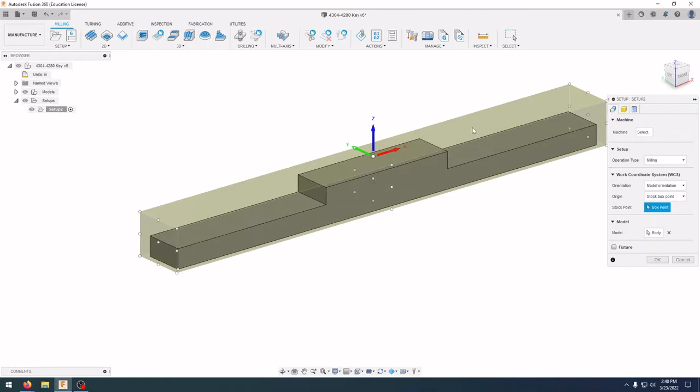We have the model of our finished part that we need. What we need to do now is create the blank, or the piece of stock that we're going to be machining from. So to do that in Fusion 360, we need to go over to our setup. We can right click it or we can click on setup up there. We click new setup. And you'll see we'll have this kind of translucent yellow box that goes around, and that's going to be the size of our stock.

I'm going to click on our stock first, and then we'll go back and finish that setup. For our mode, we are going to have a fixed size box, and the width in the X is going to be 3 inches. The model position is going to be centered in the X direction. Our depth is going to be 0.25. And our height is going to be 0.25. But our model position in our Z is going to be offset from the bottom 0 inches.

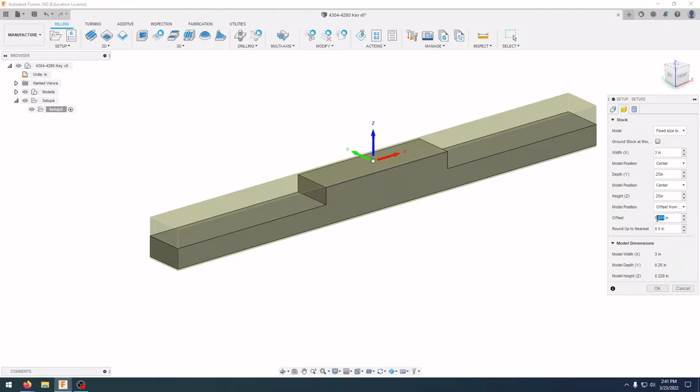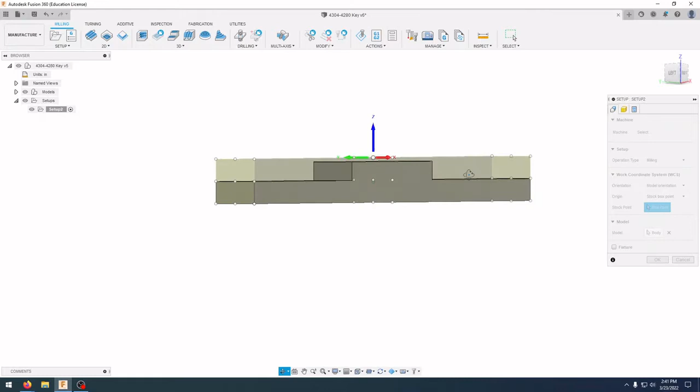So when we're done, we have a model that is all the way on the bottom of our part, and we're going to machine off the top so that we'll be able to do this in one operation. So then we want to go back to our setup, and we want to make sure that we are doing a milling operation. And our stock box point is going to be in this top left corner.

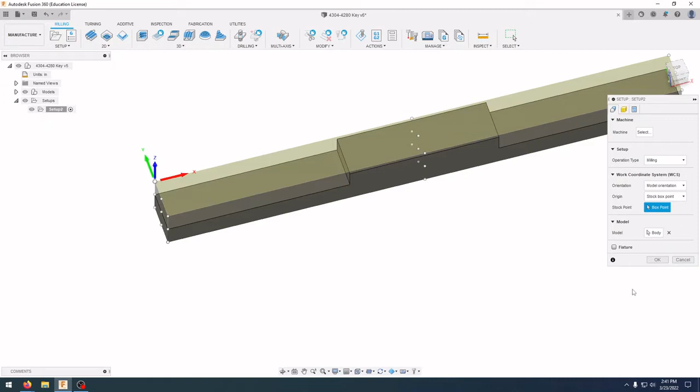You'll see when we go over to our machine, we're going to have a part stop over on the left-hand side here. We're going to have the solid jaw of our vise over here, and we'll have zeroed our machine in the Z axis coming down. So that is going to be our 0,0,0, or our origin, from our CAM software over to our machinery.

Okay. The first toolpath we are going to do is a facing toolpath that will take off the very top of our material down to the top of the model. How we do that is we click on our facing toolpath up here. And after we selected that one, we're going to select our tool. And for this, we are going to use a 3/8 inch flat end mill.

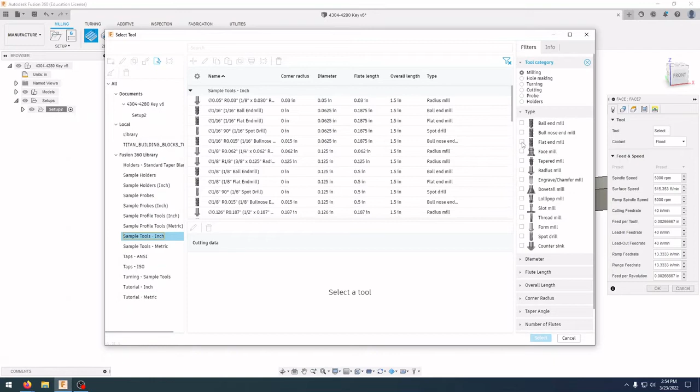So over on the left-hand side, we have our sample tool. We're going to click on inch. And you can either scroll through that, or on the right-hand side here, you can look for our flat end mill and select our 3/8. We want to make sure that we're using a flat end mill and not a round over or anything else like that. After we have that, we're going to hit select.

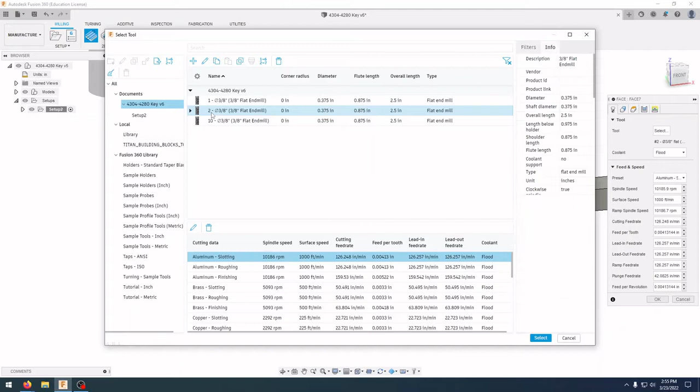And we need to go back in there to be able to change the number of our end mill. So you can see I already have this one done. In our machine, our 3/8 inch flat end mill used for milling steel is tool number 10. And when I brought this one in, it came in as tool number 2. And what I can do is I can highlight that and come up top where it says renumber tool.

Select that. I'm able to change this and go from number 2 to number 10. Select renumber, select again, and now we can see that we have tool number 10 right there. We want to make sure that our coolant is going to be flooding, so we're going to have coolant on here.

Our spindle speed for this part is going to be 4,000 RPM. Our cutting feed rate is going to be 20 inches a minute. Lead in is going to be 20 inches a minute. Lead out is going to be 20 inches a minute. And our ramp and plunge feed rate are also going to be 20 inches. So then for our geometry, it will already have that selected. Our heights, when we do this, we always want to go from our model top for our heights.

And then for our passes, those are fine. Linking is fine. Press OK. And now we can see that on here, we're going to be coming down from the right-hand side, and we're going to be cutting towards our part stop. We're going to lift up at the...

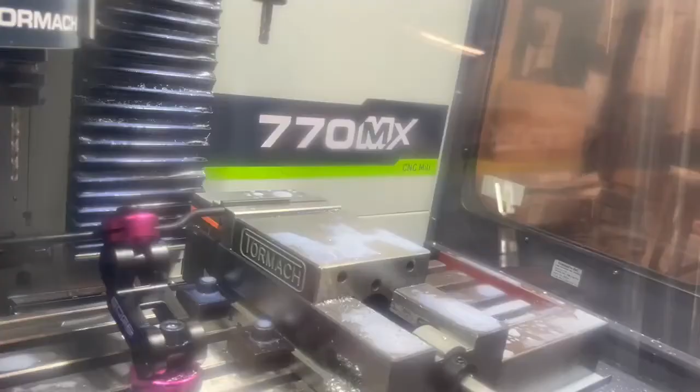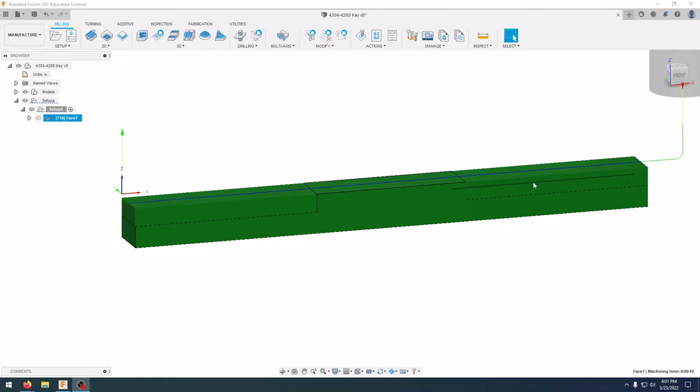The next toolpath we want to complete is a 3D adaptive toolpath. What that's going to do is it's going to lay kind of an imaginary mesh over our model, and it's going to take out the things that we don't want, such as this material over here and this material over here.

So under our 3D, we're going to click on adaptive clearing, and our tool should bring in our number 10 3/8 inch flat end mill. If it doesn't, you're going to want to come back in here and reselect our tool. We want to make sure that we have flood coolant, and make sure that we have our spindle speed of 4,000, our cutting feed rate of 20, our lead in feed rate of 20, lead out feed rate of 20. But we're going to change our ramp and our plunge rate both to 15 inches a minute.

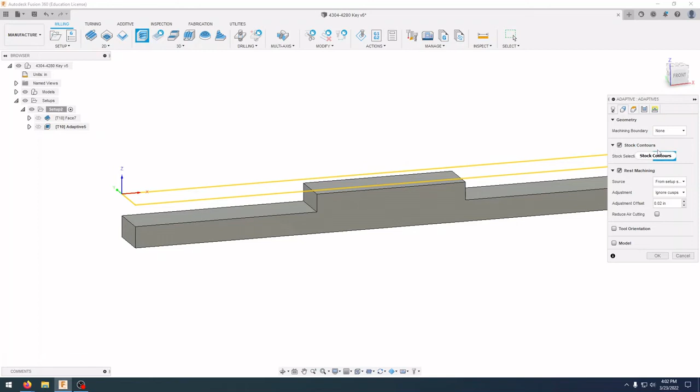Next up, we're going to go over geometry, and we are just going to leave that; there isn't any machining boundary. It's just going to take a look from the top, and it's going to go down until it is able to cut that out. For our heights, we're going to select our model top for everything. And our offset from our model top, we're going to go down negative 0.125, which is 1/8 of an inch, meaning that it's only going to go down until we get just below that.

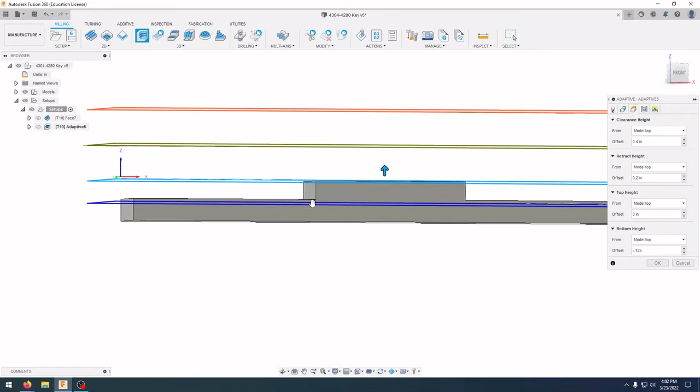For our passes, we want to have an optimal load right here of 0.025. What that's going to do is make sure that we are taking off 0.025 each pass. Our minimum cutting radius is going to be 0.0375. I want to make sure that we have our machining cavities selected. We're going to be doing a climbing toolpath. What's going to happen is it's going to go with the direction.

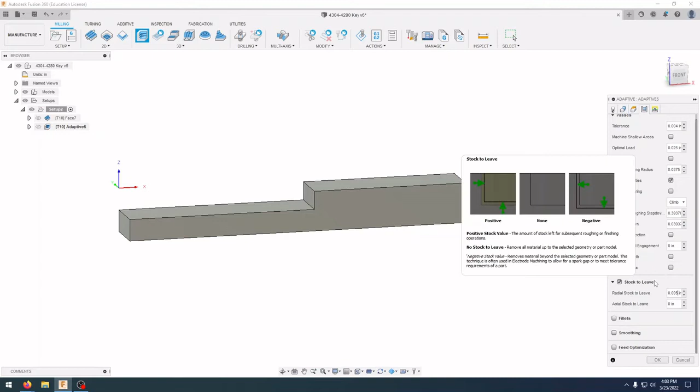The last thing that we want to do is we want to come on down to our stock to leave, and our radial stock to leave, we want to leave 0.005 or 5 thousandths, and we aren't going to leave anything axial. Okay, it'll generate that, and we will see that we have our adaptive toolpath.

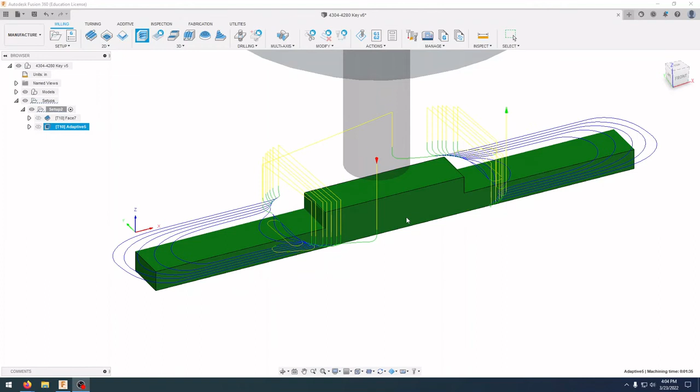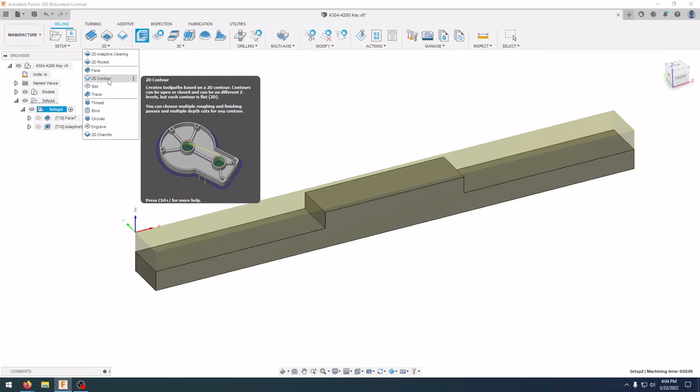Finally, for our last toolpath, we've already faced off the top. We have cleared that out. The next thing that we need to do is we just need to touch up these two edges right here to make sure that we are in tolerance. And to be able to do that, we are going to go back to our 2D and we are going to find our 2D contour on that.

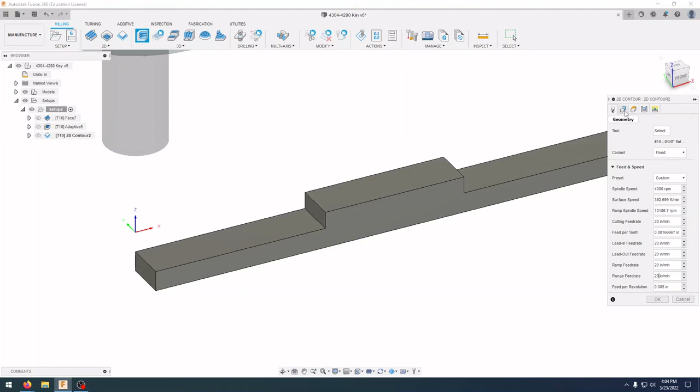And our tool, again, is going to be a 3/8 inch flat end mill. We need to make sure that it's tool number 10. Spindle speed is 4,000. Our cutting feed rate's 20. Lead in and lead out are 20. Our ramp can be 20. Our plunge rate can be 20. For our geometry, we're going to select that inside line right there. And we are going to select that line right there.

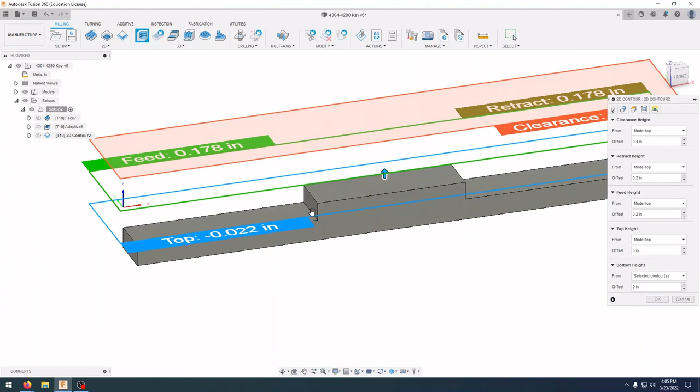For our heights, we want to make sure that we are doing everything off of our model top again, except for our bottom height, that is going to be our selected contours. We want to make sure that it gets all the way in there. For our passes, just leave that; all looks good. For our linking, that looks good as well. Press OK. And what that's going to do is that's just going to touch off and finish off that part.

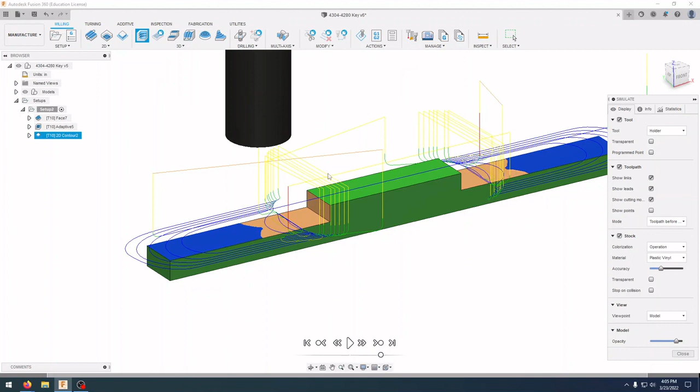So if we want to preview this, we can click on Setup, right click, and click on Simulate, speed it up a little bit. But we can see all of our toolpaths as it goes through. When you're done with this, please show your instructor, and then you will be able to go and load up the files and load up the parts in the mill to be able to mill these out.